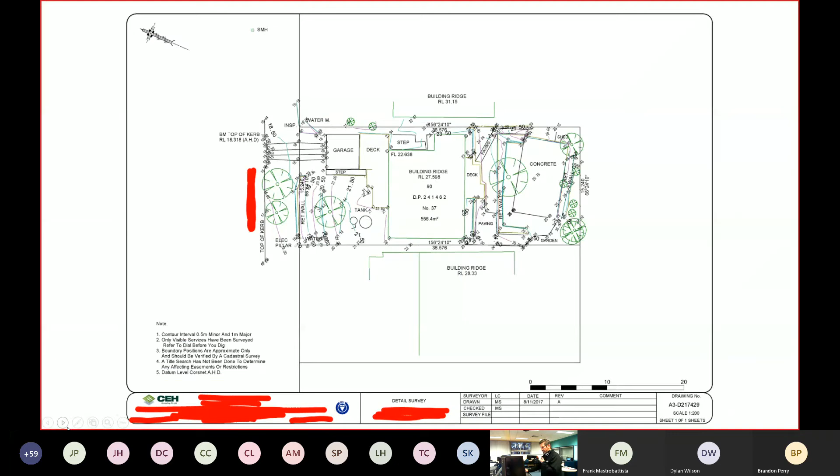Now, if you can see nice and close, it's giving you the heights. We've got 18 metres of contour running across the retaining wall. It goes quite steep up there. We've got a deck - that's the existing house.

They even give you the RL of the building ridge, which is obviously at the top of the house. We're having our retaining walls out the back. I've got a deck with the heights. So it goes from 18.9 here all the way up to 26. It's a steep block - it's bloody horrible, but anyway.

That firstly goes to the designer, and he puts that into his Revit or ArchiCAD or AutoCAD. Okay, now can anyone see this? BM - everyone understand what BM stands for? Benchmark, yes. Top of kerb - we have a reduced level of 18.318.

AHD - everyone understand what AHD is? We spoke about it, I just want you to remember. Can someone tell me in the chat box?

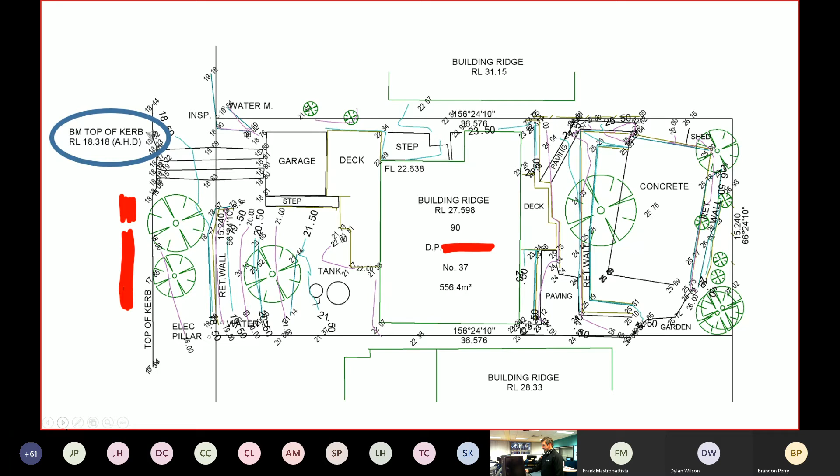Sam, you're all over it. So that's on the top of kerb. There's a little cutout and a little pin showing.

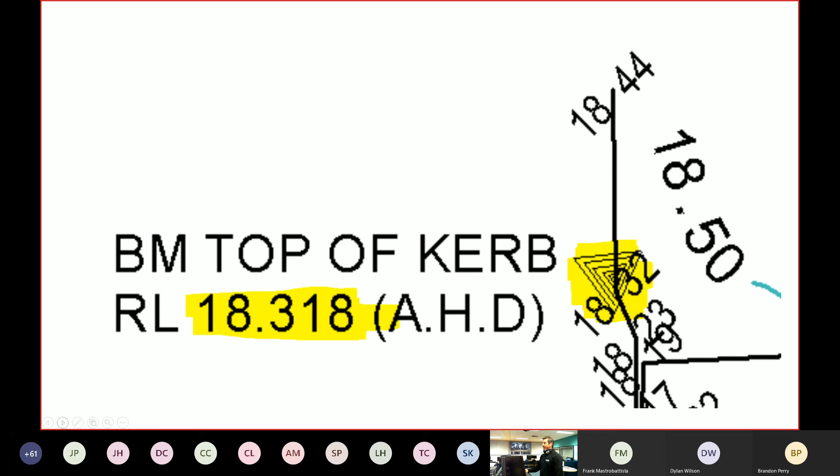So the whole job is reflective of that, right? So when they go to design, you can see before they demolish everything, they've designed the building as it is,

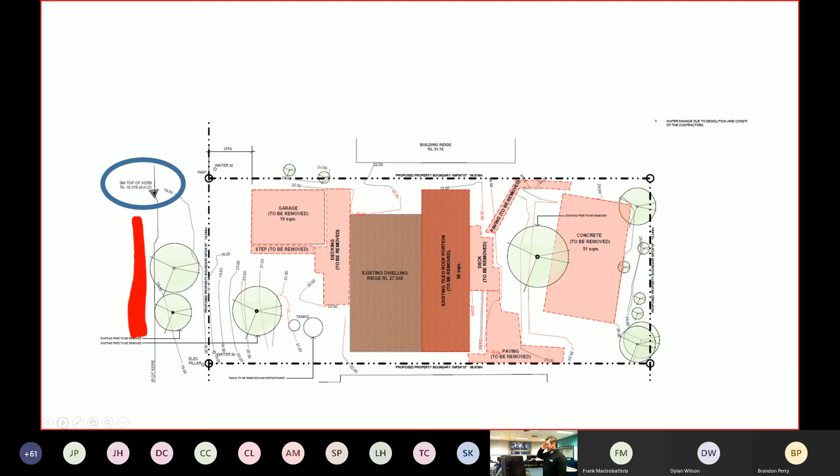worked out the contours, and everything pretty much works off that benchmark. Has anyone ever done that on site? Worked out benchmarks, reduced levels on site? As a site foreman, I used to do it all the time.

You can see that's the finished job, or the future job. This development application has been approved. You can see on the left, it's still reflective of that benchmark. Everything works off that, okay?

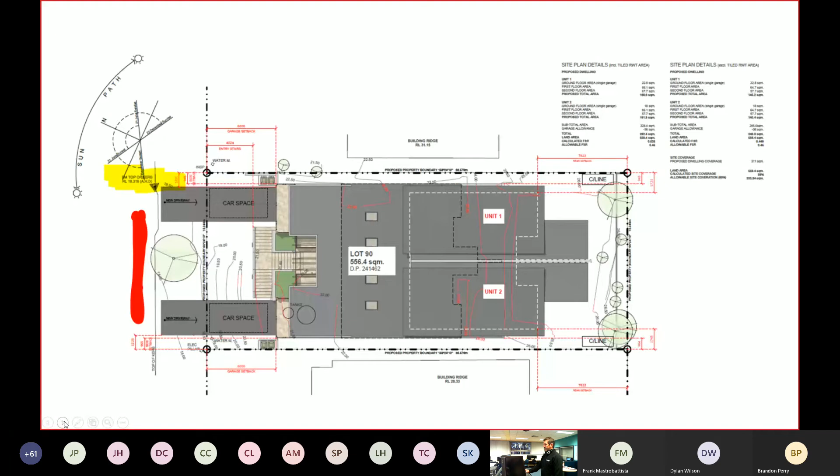So before and after, working as per the benchmark. All right? And you can see there is my finished, or hopefully finished project, which hopefully I might do in a couple of years, I hope. At any rate, the actual way they design it is they work off the contours first.

So when they get their Revit program, they put it in and then they start building the job. And he said it's actually easier when it's got, because that actual plot there, that's the existing line of the old building. So we've just followed that, if you can sort of see it there. So it's sort of the old building and it's just fine.

I'll just put a second extension on. So that puts it in a bit of a 3D perspective. And then you can see the existing ground line and you can see natural ground line and finished floor level, how it's adapted to suit.

All right, and now that's a hard job, isn't it? Well, I think it's bloody hard.

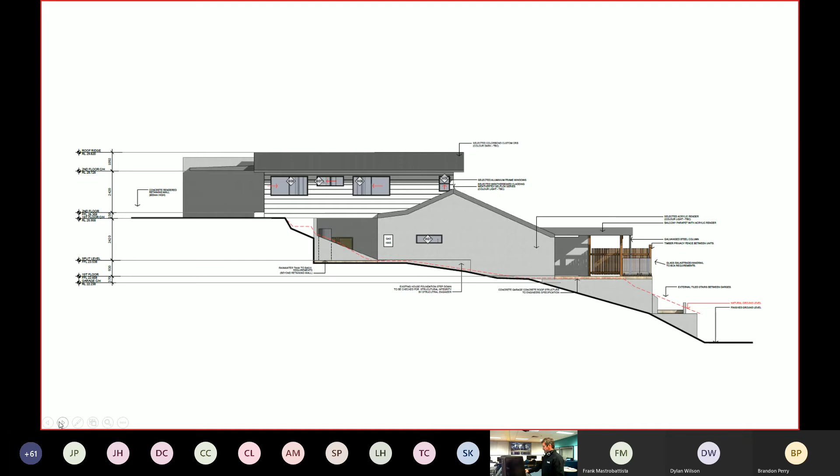That's the east elevation. We've got the west elevation. Okay, now what I want to talk about is these RLs. So as a builder, you need to get these RLs pretty spot on, don't you?

You don't want to be out. So as soon as you get the benchmark, as soon as the surveyor gives you the benchmark, you got to start, pull out your dumpy, get your machine in, and you got to plus and minus, really, don't you? What do I mean by that?

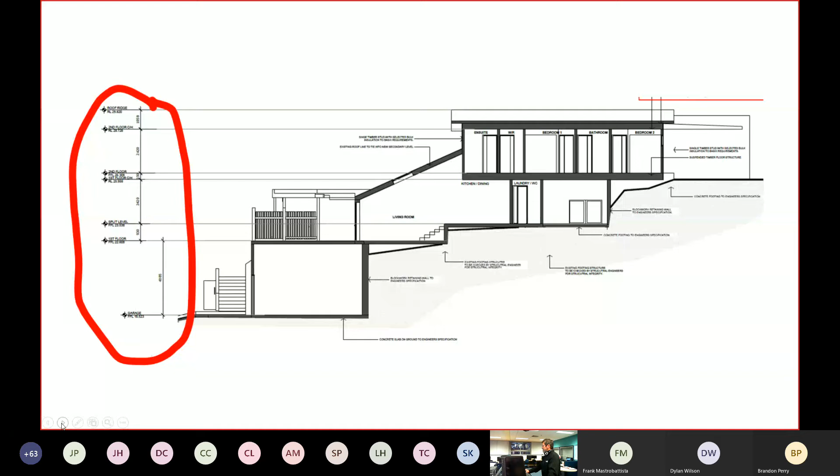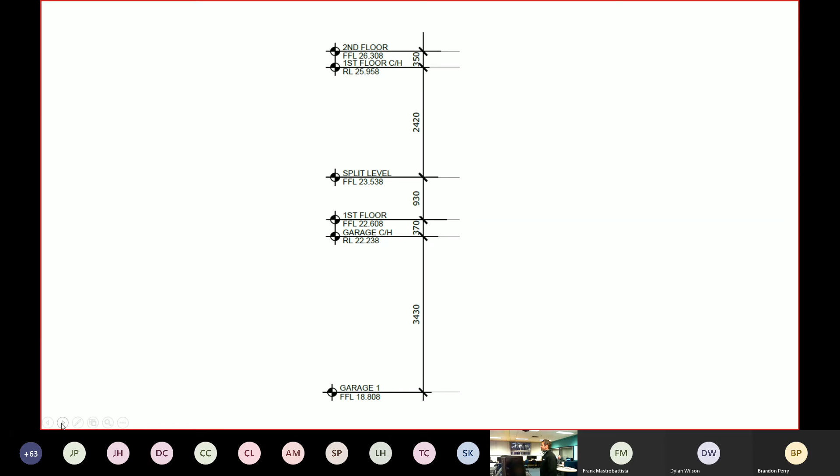I mean, for example, we're going to obviously get the machine in and start with the garage first, aren't we? So see the finished floor level, 18.808. What was the benchmark? I think it was like 300 or 400 less or something, I think, off memory.

And then it goes up 4 meters to the first floor, so it's quite a steep block. So it's going to be quite hard to get it right. I would probably on this job have the benchmark at the top of curb, and I'd probably get them to give me another benchmark up top somewhere. Might cost you an extra $300-400, but it'd be a lot more accurate.

Some builders might just use that. That's fine. They'd be confident with themselves, but I'd be probably inclined to get another benchmark or datum to work off.

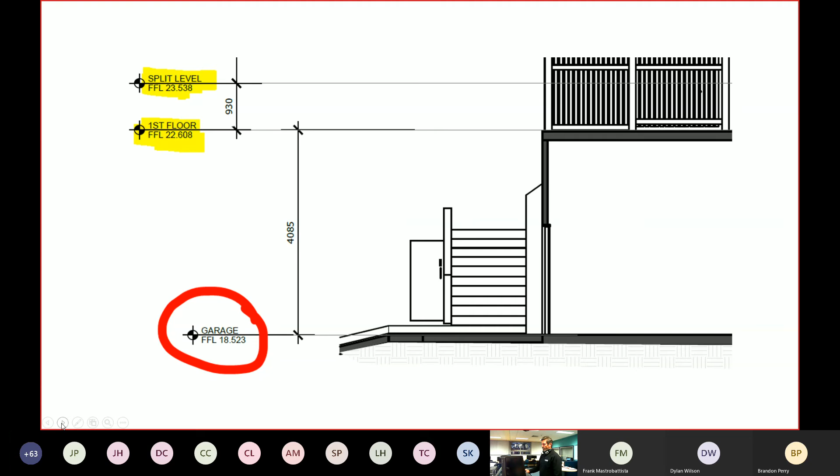All right, this is actually, it might be a little bit hard to understand, but I'm going to put a forum up. I'm going to get you to answer it. Now, obviously the answer is going to be there, but I want you to understand or have a think.

The builder has to set up an automatic laser level, or dumpy, whatever, to begin excavation. I want you to calculate the following. So firstly, grab your calculators or your phones. What is the HOC, or the reduced level instrument height, if, so we go to set it up, right?

It's 2.090 reading from the benchmark. Can someone tell me in the chat box?

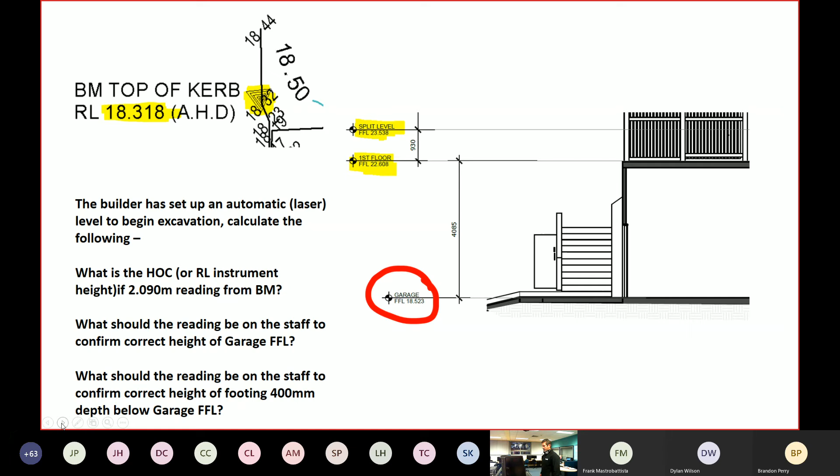Let's do this one first. What is the HOC? Well, I've called it height of collimation. When I actually start a job, every job I've ever run as a foreman or site manager, I got this book, A4 book, and my front page has always got the benchmark and the excavation lines, because that's obviously where you start. Every time I've always got it.

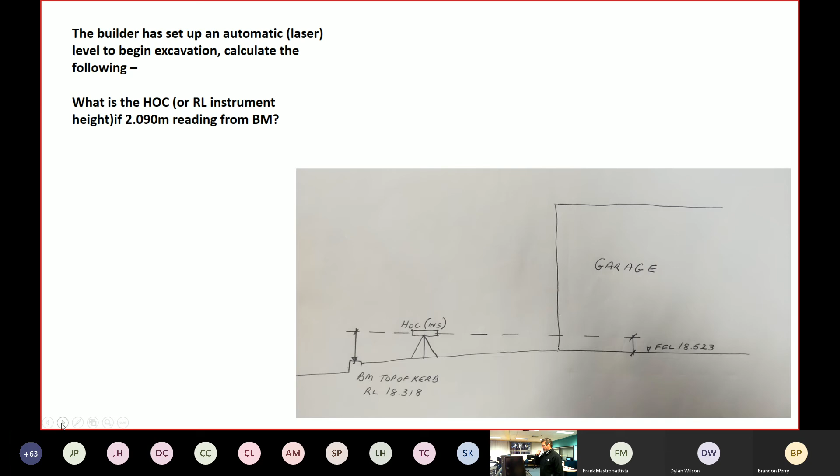All right, well done. 20.408. Does that make sense? Now see that little diagram? Does that make more sense? Yeah? That's the height of my instrument. So my reduced level as of that instrument is 20.408.

That's something I would do on site. That'd be the first thing. Right, what's the height of my instrument? That's where I work everything. Now you've got the machine in.

What should the reading be on the staff to confirm correct height of the garage FFL?

Let me go back. The garage, sorry, I can't talk properly. FFL is

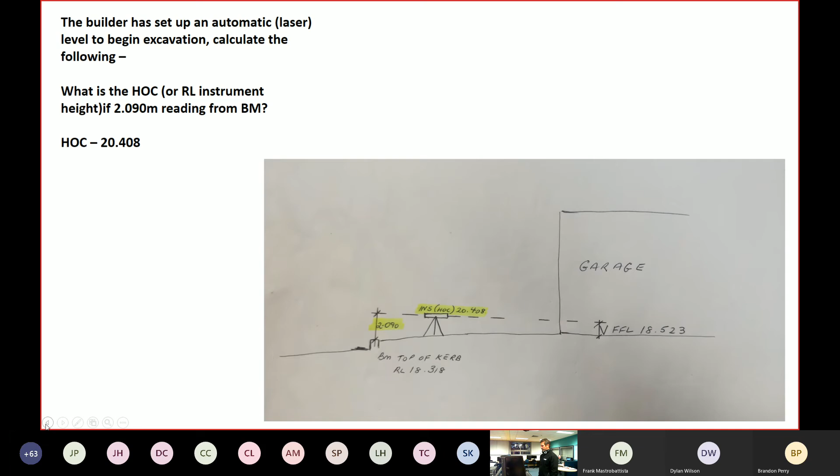18.523. Now, the garage hasn't been built yet. We've demolished everything. How do I know I've got to get to that finished floor level? I have an instrument height of 20.408. I'll go back to the question.

1.885. What should the reading be on the staff to confirm correct height of garage FFL? Okay. Does that make sense?

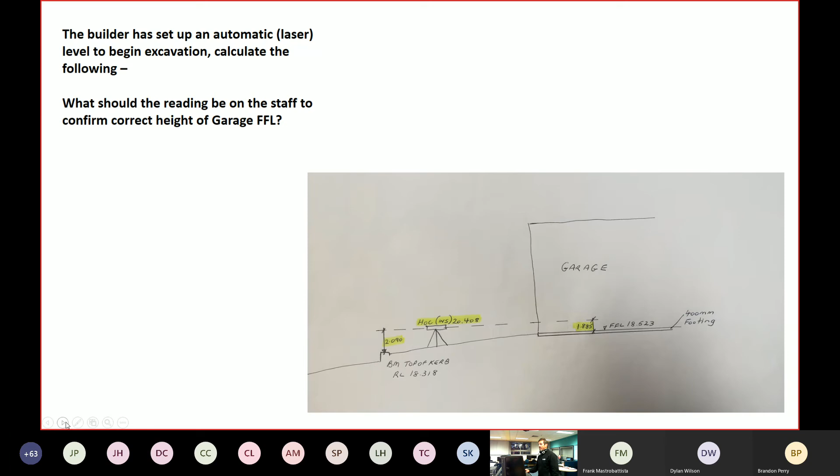That's a little picture. I would have that on the first page if I was a site foreman or builder on a job, working to that reduced level. I'm not sure, apologies for those that use this all the time.

All right, next question. What should the reading be on the staff to confirm the correct height of footing, 400 mil depth below the FFL, all right?

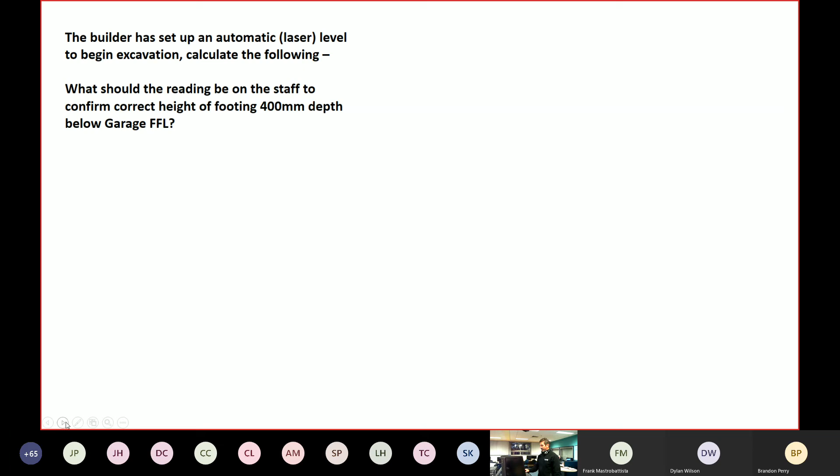Thank you, Alan. What should the reading be on the staff to confirm the correct height of footing, 400 mil depth below garage FFL?

2285 is what you would have your staff. You'd have your labourer walking around on the staff, and he'd be going, the laser's like it's 20 mil too high. You said the machine's got to go down lower.

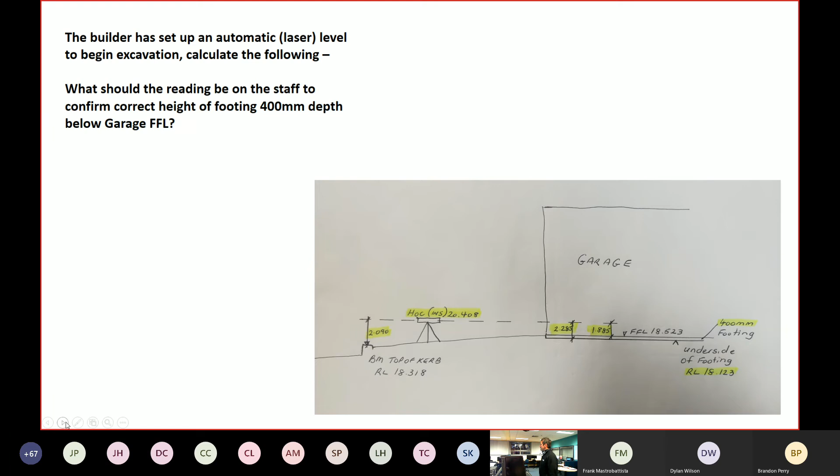You never do it low enough, do you? You always go, oh, that should be enough, and you check it, nah, it's got to go another 50, 100 mil. Your reduced level would be 18.123. That's the underside of your footing. Does that make sense? I'm going to put that up for you to have a look at.

I was going to do a quick quiz, but I ran out of time, so apologies. I'll probably do one for tomorrow or Thursday. But that's, in its simplest form, a height of collimation or your instrument height that you work off. That's what I would do on site.

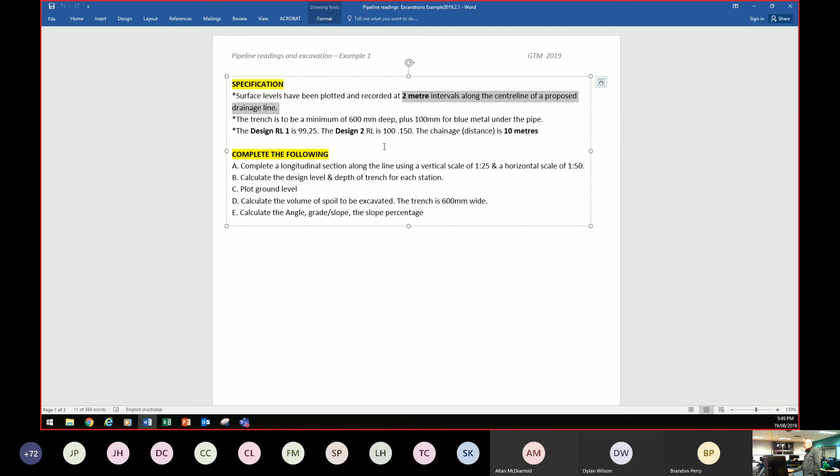It's 900 mil. Okay, so you've got a 900 mil difference. So there's 900 mil fall in that pipe over 10 meters. Okay, so what we've got to do, or what you've got to do, we're going

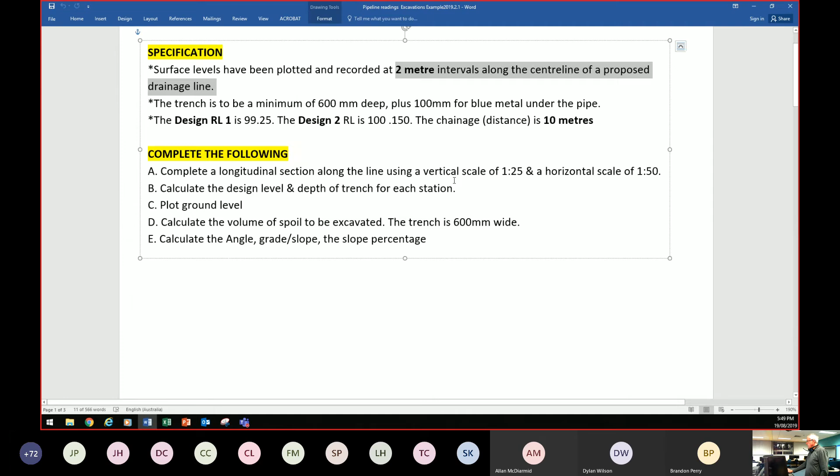to calculate the grade. We're going to draw it, and we'll just go down here and have a look. Okay, so virtually how it starts off.

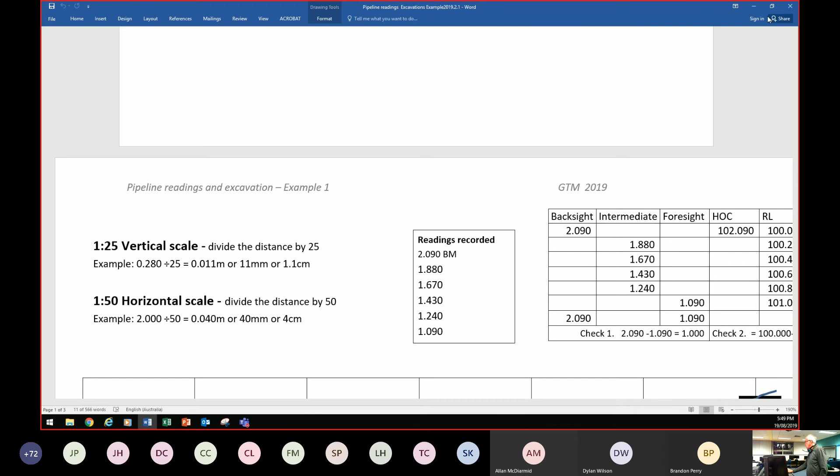How it starts off is the same as what you've done. This is just an example.

So we've got readings here. If we look in the middle, we've got our readings recorded: 2 meters and 90 is a benchmark. Then we've got readings here of 1880, 1670, 1430, 1240.

Everyone's familiar with how to enter that information over here. The first reading's our backsight, the next one's our intermediate sights, and the last one's our foresight. There's our 1 meter and 90.

So this is exactly what you've been doing throughout this last month. We then do our RLs, and this RL here could have been 20, could have been 30. We always pick a nice easy number because it makes your calculations that little bit easier.

That's the only reason that number 100's picked, it's just for an easy calculation. So when we do this height of collimation, it's 102 minus our 1880. That gives us that height there.

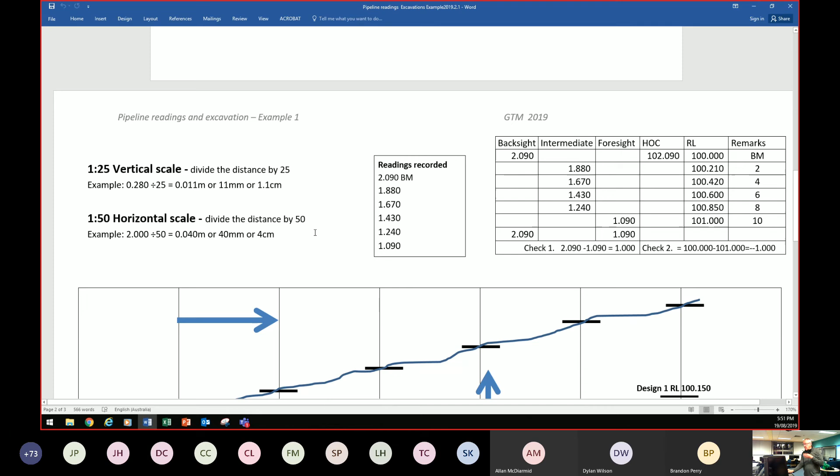We just progress through down there. We do our checks the same: backsights, foresights, we get a meter. First RL, last RL, we get a meter. That's the important part, to make sure that your booking sheet's balanced.

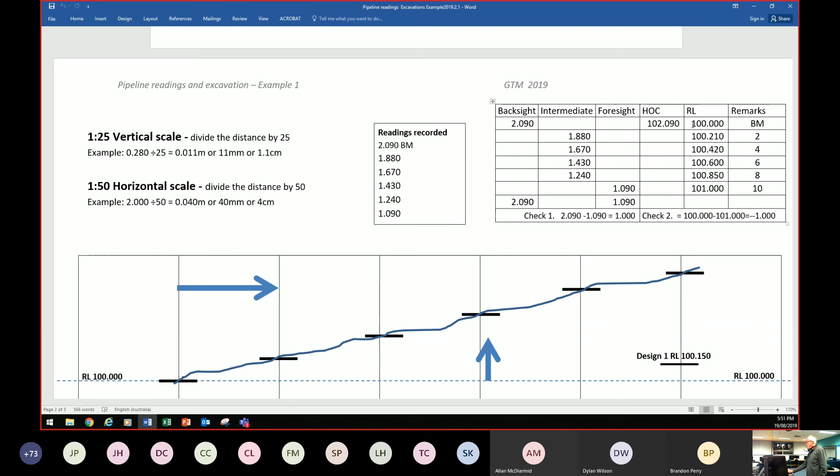Now, what we do when we transfer these readings here, the best way to show this. So we're going to transfer this reading, I'll just make this a little bit smaller. Can everyone still see that?

So what we're doing, this RL here of 100 is our first RL down here at 100. The next reading at the 2 meter mark. So this grid is 0, which is where this 100 RL is, that's at 0. Then we've got 2 meters, 4 meters on that line there, 6 meters on that line there, 8 meters on that line there, 10 meters on that line there.

So what we do then, we transfer these RLs down there. So we've got the 100, 100.210, 100.420, and they're where they are at 2, 4, 6, 8, and 10. We're just putting those readings in here on this line here.

All the way across there. So they're just the RLs from that small height of collimation booking sheet.

Then what we do, we've got a design RL. Now what the design RL is, if I...

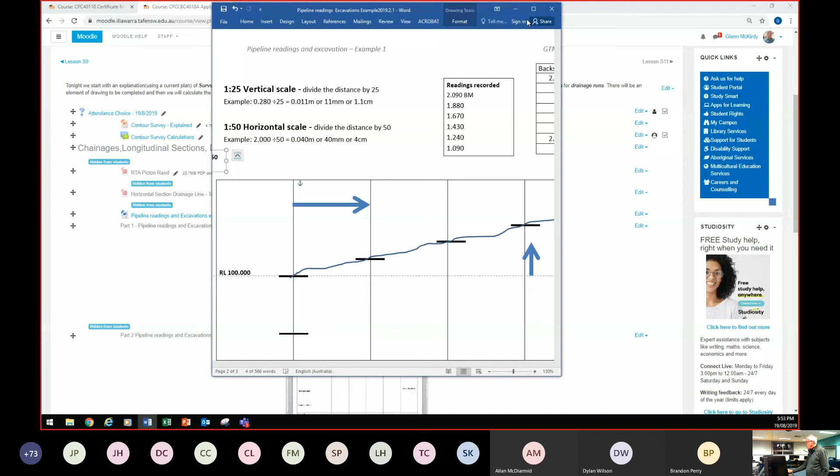So we've taken the RLs from here and we've entered those in from here. The next step we have is the design RL.

Now we have another pit at the other end, and it's at 100.15. So in between these two pits, this is exactly what we've got here, 100. Our two design RLs, which we went up here, were 99.25 and 100.15.

Now, how we arrived at that, we've got to get a line somewhere to get our measurements off. So this RL of 100 has just been put in there.

Now what happens with that, if we look at the... just got to get my calculator out of the bag. Or is it over there? It's not over there. Okay, so we've got 150.

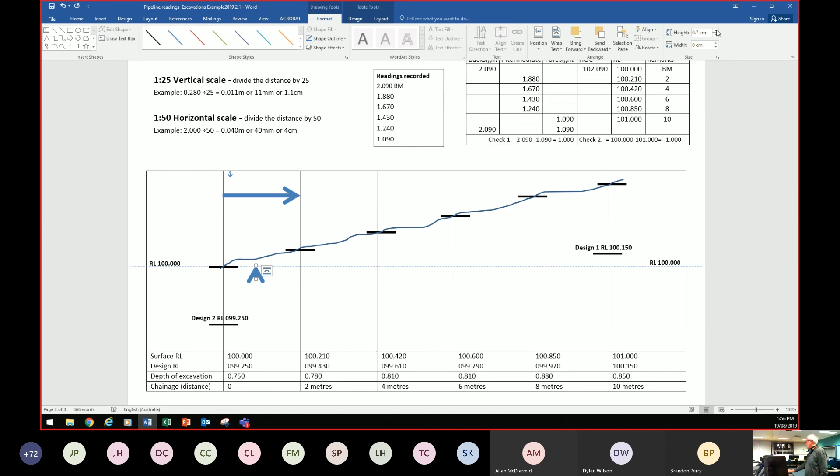Now what would happen down here, below that 100 RL, this is 750. So if I get the calculator and put 0.75 divided by 25, it's 0.03, so that's 3 centimeters. So I right click on the arrow, go up here, and put 3 centimeters there. I drag it over to the 100 millimeter line, and that's where that would be at the bottom of that line.

Now does that make sense? So what we've done, we've put the two pits in the correct spot. Okay.

So that's my design RL there, design 2 as per specification. There's my design 1, and this RL of 100 has just been put in there so we can measure up and down from it. We measured up to 100.15 and down to 99.25. Okay, so that's our two design RLs.

Then what happens? We've got a design RL to start with, a surface RL which is 100, right there, and below that is the bottom of our trench, 99.25. Now what happens is we've got a...

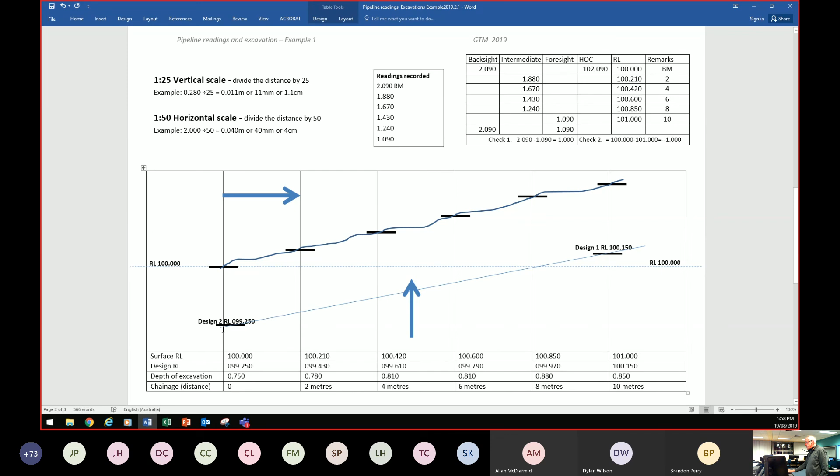If this is our drainage line, we put our drainage line through there. It goes from point to point. Now what happens? It has a rise every 2 meters, a consistent rise every 2 meters, so we've got to do a calculation for that.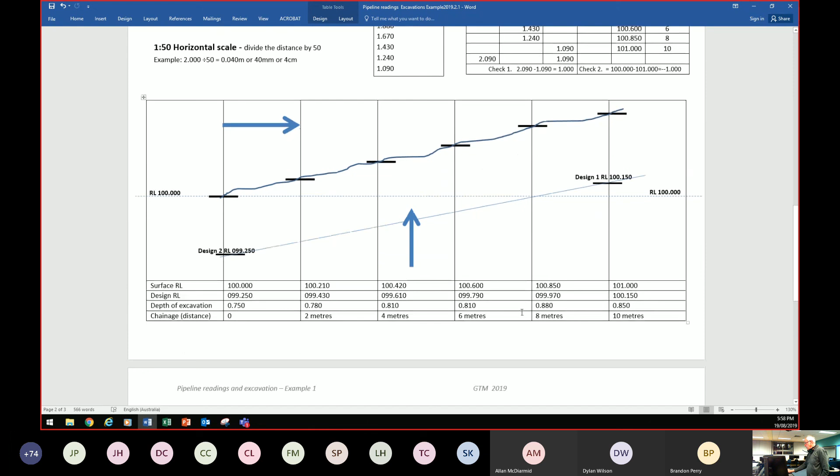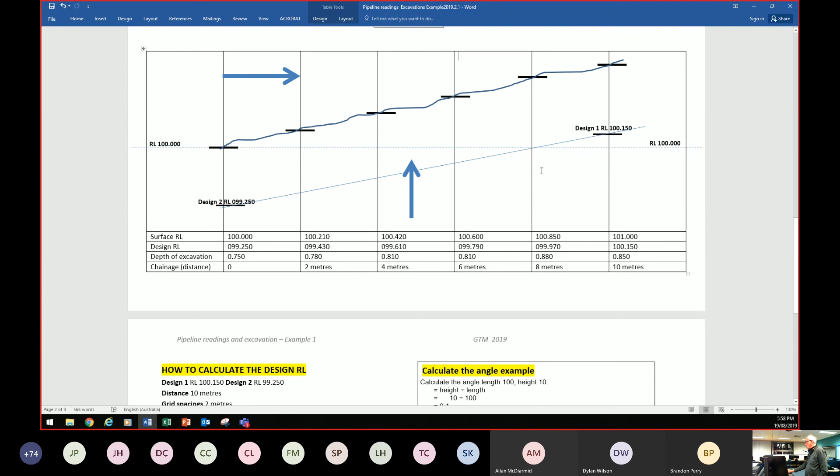Now where that calculation is, is here. What we've got to do is take 100.150 minus 99.25, and then divide it by 5 because there's 5 grid points: 1, 2, 3... 5. So we divide by 5, and that gives us 180 mil.

So from here, just delete that. There's a film that actually accompanies this, and that's for if you get stuck. Help. Okay, if we add on 180 mil onto 99.25, we get 99.43.

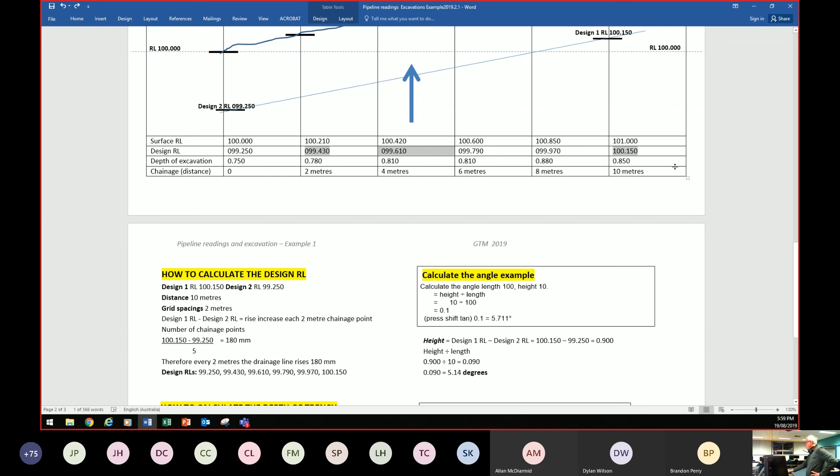If we add on 180 mil, which was the calculation we did down here, we then get 99.610. Then the next 180 mil, so it's a consistent rise. That pipe goes through in one grade, it's not in 2 different grades, it's in one grade. So our design RL ends up being right, because we've got 100.15 and when we added on our 180 mil per 2 meters, we got to 100.15.

Now the next step is you've got to calculate the depth of the excavation. So if we look at the depth of the excavation, how we get that: 100 minus our 99.25 gives us 750 mil. Then 100.210 minus 99.430 gives us 780 mil of depth. That's how deep our trench is.

Then we've got 100.42 minus 99.61, it's 810 mil deep. The same here, we just do these calculations: 810 mil deep, 880 mil deep, 850 mil deep. All right.

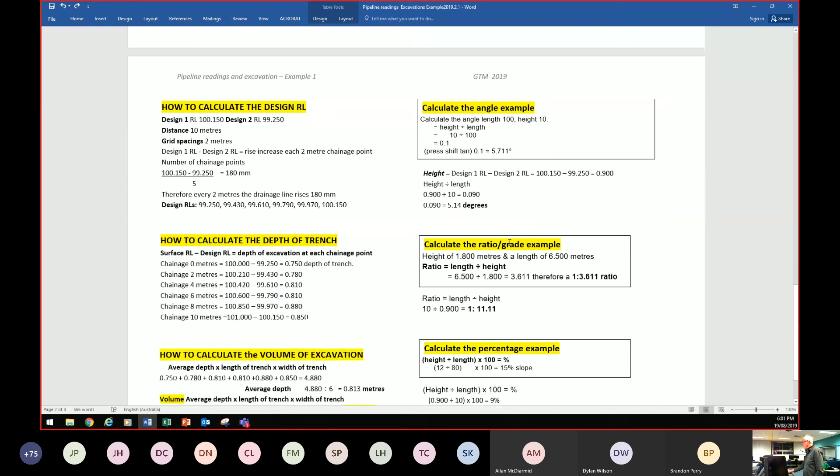Then what happens with this? We'll come back to this in a sec. Because you've already done how to calculate an angle, completed how to calculate a ratio, and done the calculations to calculate the percentage.

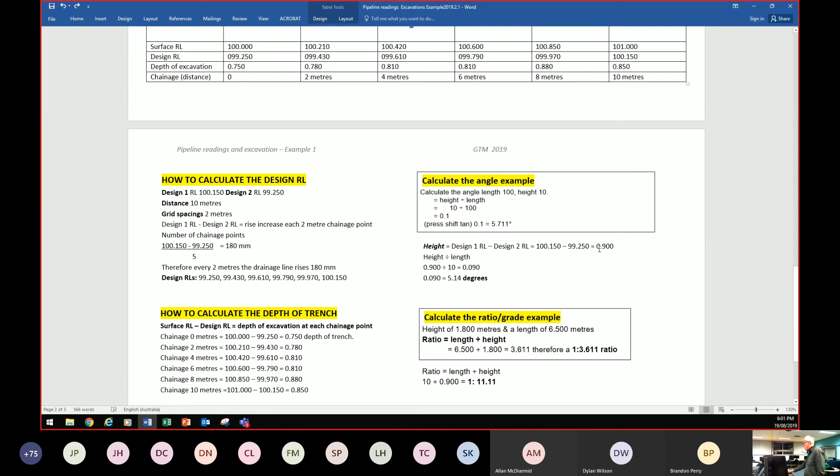So on this RL here, in calculating the angle, it's height divided by length, and then we do shift tan and put our decimal place there. In this instance, we've got 100.15 minus 99.25 gives us a height of 0.9. We divide that by 10 because it's over 10 meters, that's the distance. And when we do shift tan 0.090, we get 5.14 degrees, which we've already done.

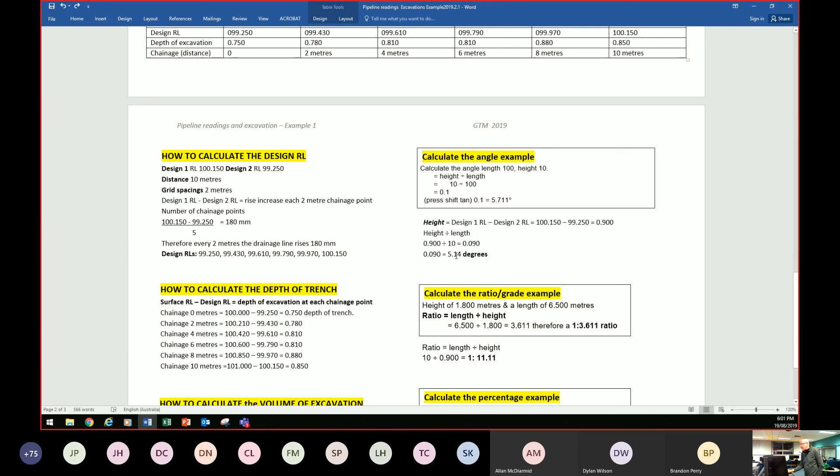So we've got to do the angle, the ratio, and the percentage. Okay, and this is just an example of it.

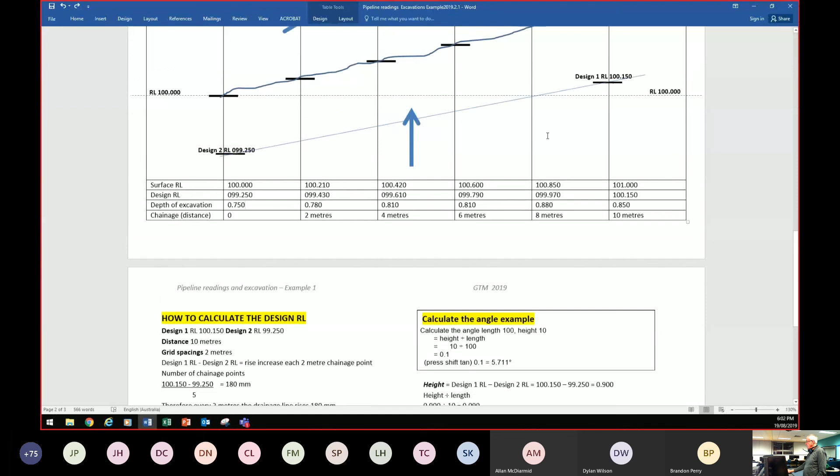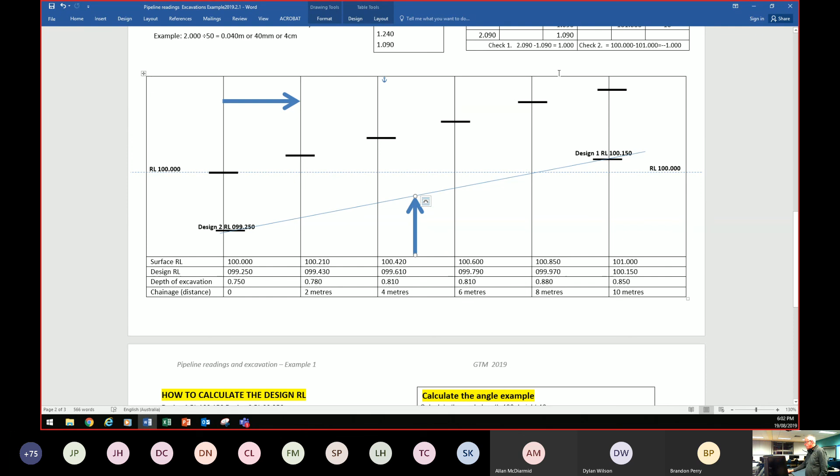So that would be your grid point there. Like I said, it's not exact like a piece of architrave - if it's a little bit higher or lower, that's fine, as long as it's pretty close. So when all those points have been put in, you then have to insert your line, which goes like that - not exact either.

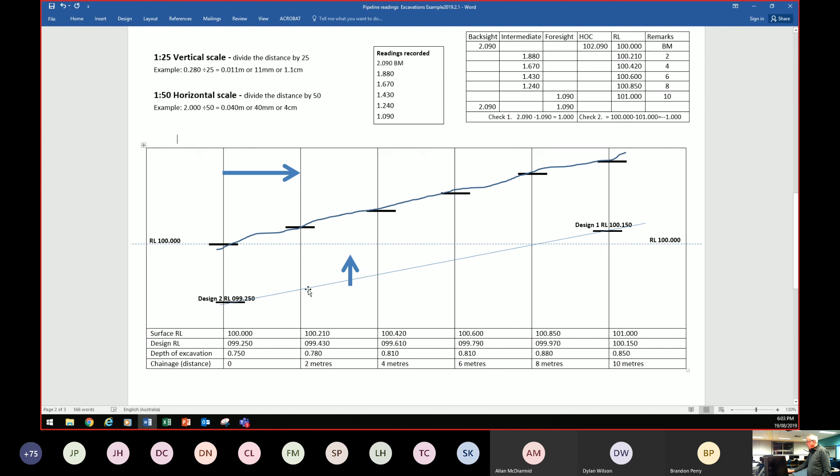So there you go, and that's the slope of the land, the contour - that line we just put in. There's our two pits, and that's our drainage line. Now what else you have to do is calculate the depth of the trench.

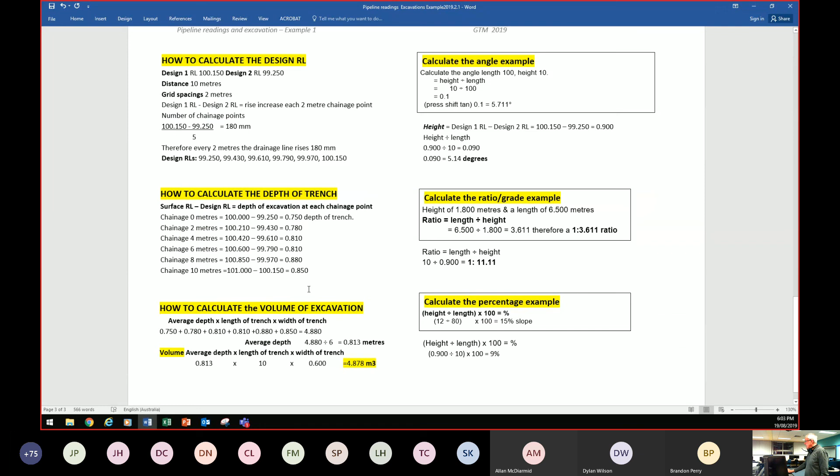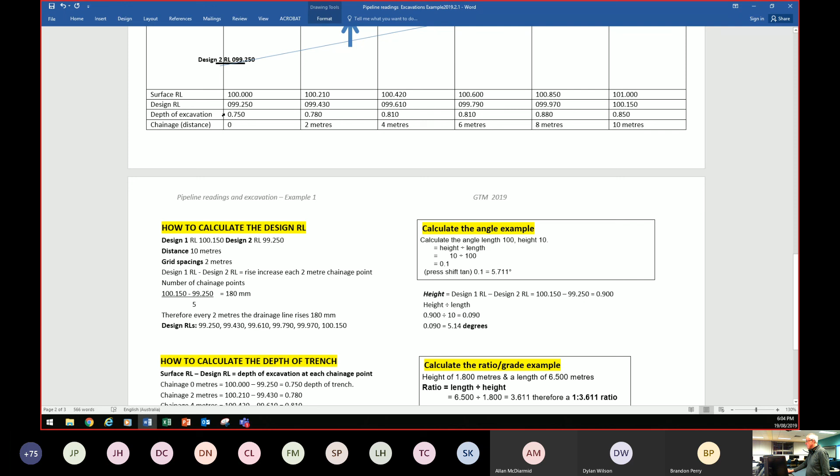Rather than going in too much with that, what it is, you've got to add up the figures: 750, 780, 810, 810, 880, and 850. You add up all those figures to get a total, and then you divide it by the number of points - there's 1, 2, 3, 4, 5, 6 points. So we get the average - divided by 6 gives us an average depth of 813.

813 mil. Okay, 0.813 meters. Look, I know it's pretty difficult. I'll just miniaturize this a bit.

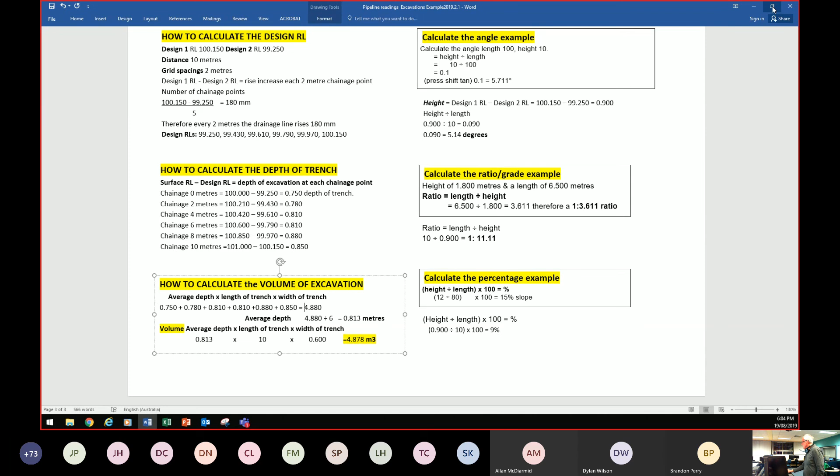There's two films here. Now, I broke it up into two sections. Don't go off yet, because what I'll do is mute the sound.

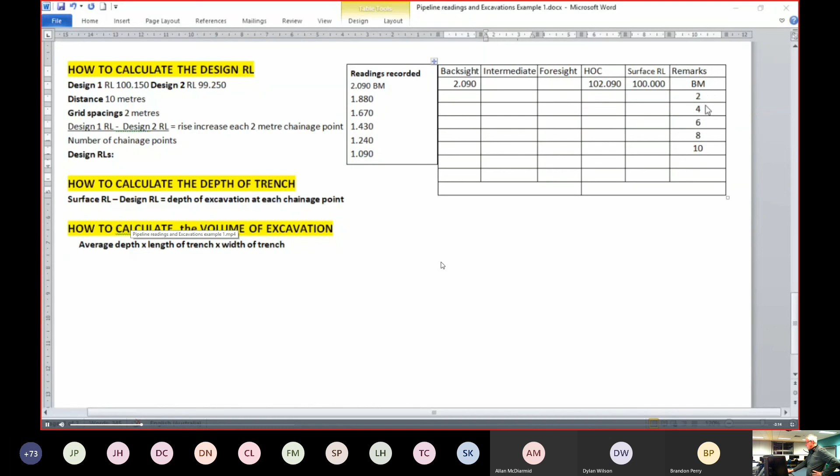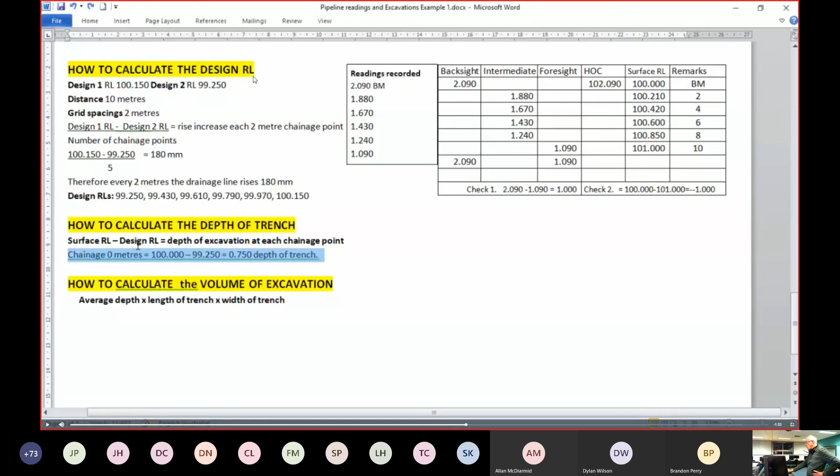Okay, all I want to do is just show you - this goes through the steps on what I've just gone through there. If I accelerate this, this is just showing you to start with that you fill that in. It then goes through how to calculate the design RL, because it's pretty hard to stand here and explain it without a whiteboard. But you can use this as a reference if you get stuck when you're filling it out.

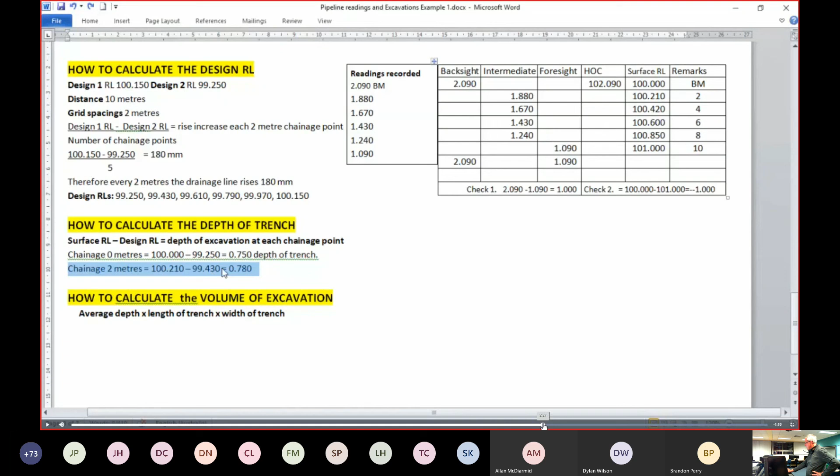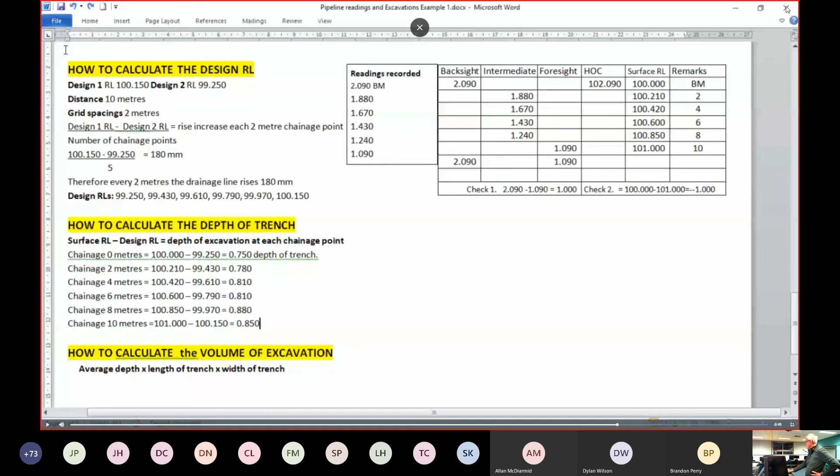Okay, so that's part 1 - that does the bottom part of the document. Now if I close that, we're not going to watch the film, I'll leave that up to you. Some of you will just go straight ahead and be fine with this, others might struggle a little bit.

Okay, the second part is this - this is the second film, and we won't listen to this either, but it's going through the steps on how you do the calculations, where the calculations come on the bottom there. So if you get stuck and need a reference point, if you need to know how to get the vertical height, it's all in these two films.

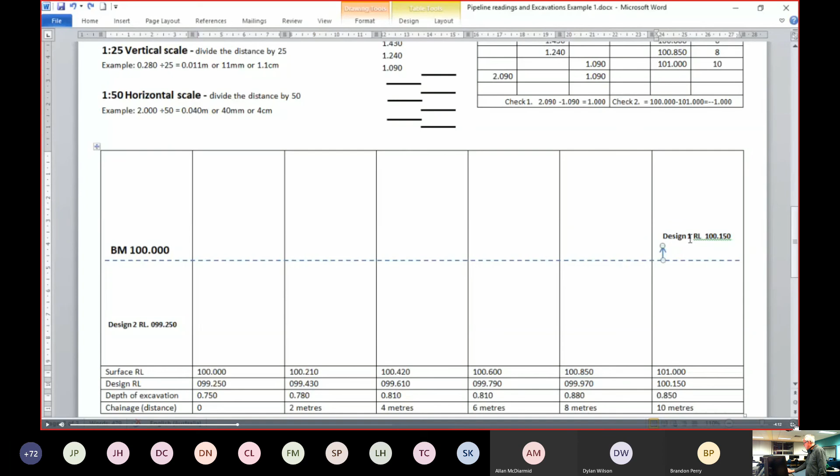All right, now I'll just miniaturize, or reduce that. So what I'll do with those two files is just put them up - put the other one up as well.

Now, just before we go any further, I'll go through one more thing - this is a hand-drawn pipe section through a pipe excavation. It's pretty much exactly the same. I think because of the tabs we've been having, giving you a height and then using the arrow to calculate the distance, I don't think anyone will really need it. This still has the surface RL, the design RL, depth of excavation and the chainage, which is just the distance.

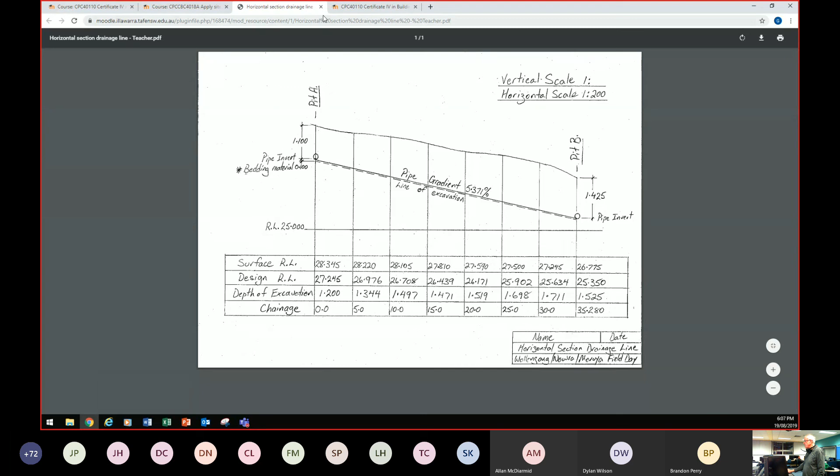All right, what I'll do with this now, I'll just open some of these - there's two calculations that you have to do, two exercises that you have to do.